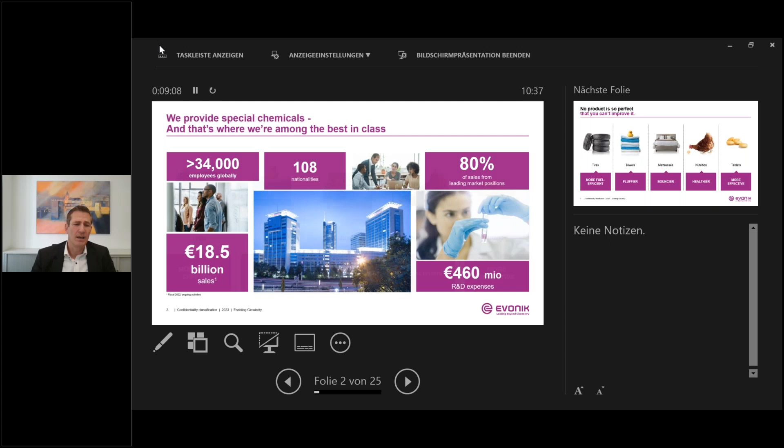And I want to inspire you a little bit with what we are doing at Evonik. Evonik, Stefan mentioned it already, is a specialty chemical company, a global company, more than 34,000 people working for Evonik. Last year we had sales of more than 18 billion euro. This means we are pretty much focused on R&D and try to help our customers along value chains to really innovate, to successfully overcome specific hurdles. A specialty chemical company means that our products are not in a B2C business. We make products better with our additives, with our products.

For instance, in the field of tires, you can't buy a tire from Evonik, but when you buy a tire, you can be sure that a product of Evonik is in it, for instance to make the tire more fuel efficient, lowering the fuel consumption. You won't be able to buy a mattress from Evonik. However, we have additives that help during the foaming process of a mattress to make bubbles of very even quality on the one hand, and on the other, the bubbles are, depending on the wish of the customer, big or small, open cell or closed. And this means you can influence the bouncy effect, and this means the flexibility of a mattress.

We don't produce tablets. In some cases, we produce the active materials, the active pharmaceutical ingredients. However, what we really do is help bring the API to the right place in the body. For instance, we have drug delivery systems that help the API go through the stomach to the gut, and then we have a specific release profile so that the API is released over a specific period of time. The benefit for you as a patient is that you don't need to take a tablet every 2 hours or something like this, but maybe just one per day, or even one within 1 week.

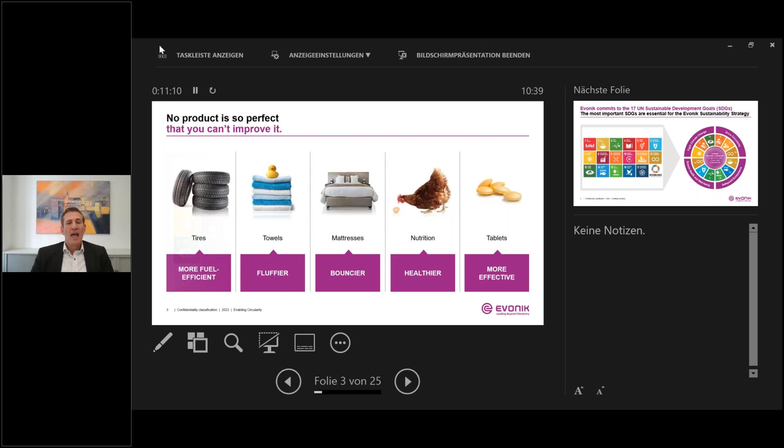I don't know what happened here.

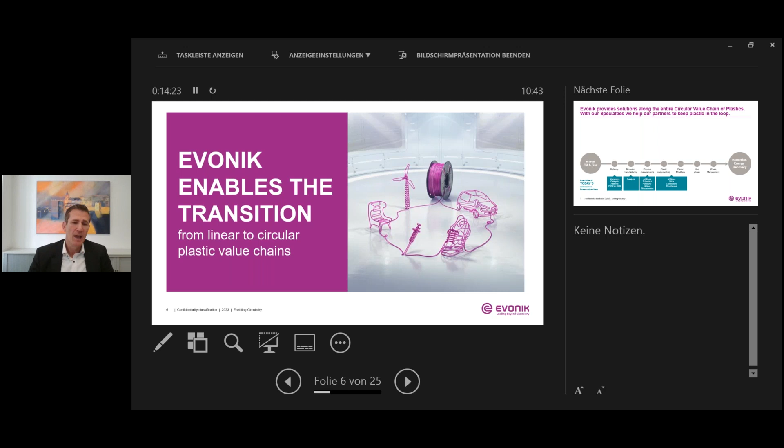One important pillar of this strategy is to enable sustainable plastic value chains. So we help our customers to meet the challenges, to overcome the hurdles of the transformation towards a circular economy. And this is what we are really doing in several different projects and actions with our clients every day. So in a linear value chain, everything starts with the mineral oil.

And along that value chain, refinery process, monomer manufacturing, polymer manufacturing, and so on, we have today many different products that are contributing: adsorbents, catalysts, our additives, but also several polymers we produce ourselves. Along that value chain, we have a significant impact on the production and products of our customers. After the use phase, the products are usually put into the waste management system and either incinerated or put into landfills.

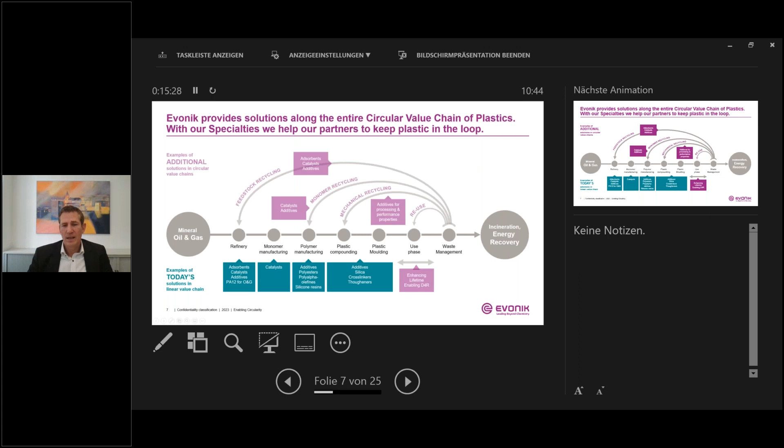And in a circular economy, we want to change it. We want to keep the material as long as possible in the loop, and this is the reuse. And when it's not possible anymore, we do mechanical and chemical recycling. And we have several specialties that help make the recycling process more efficient and the quality of the recyclates better.

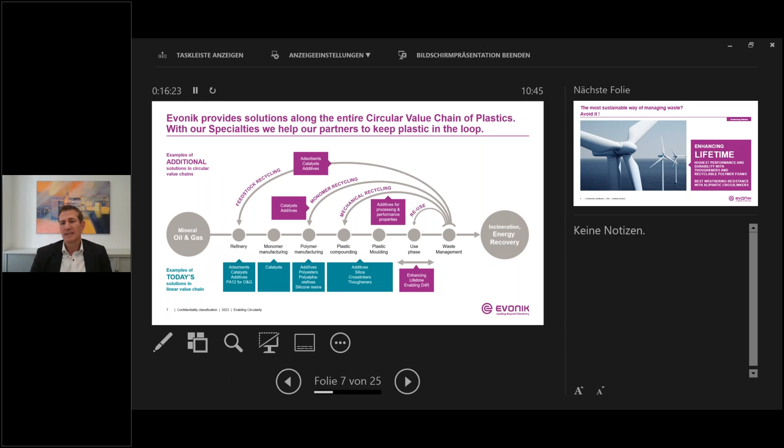In addition, we consider improving durability and enabling design for recycling concepts as part of our circularity ambition. And therefore, we are also contributing a lot to help our clients make products more durable and make design for recycling concepts possible. What does it mean? So, for instance, we have many different products that are used in wind blades.

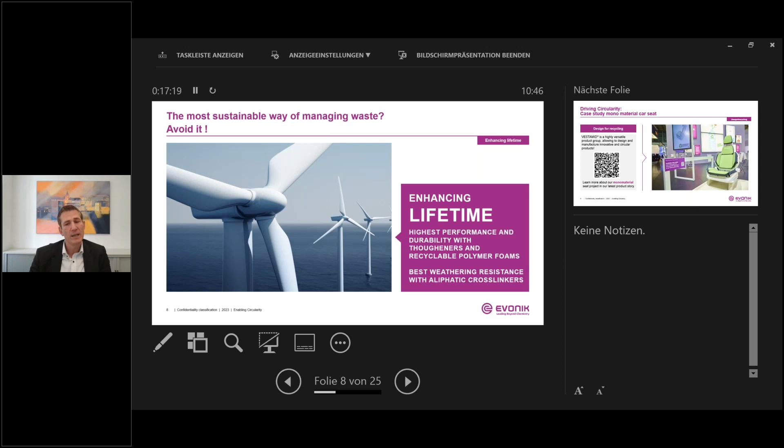For instance, in the coating, we provide aliphatic cross-linkers with the best weathering resistance, so that the rotor blade is covered, and the weathering resistance provides higher durability. We also provide foam material which is used in the core of the wind blade for stability reasons. This foam material is based on polymethacrylimide chemistry, and we are able to recycle it as well. So the foam material itself is recyclable. This is one example of what we consider design for recycling, and this is another example.

In our portfolio is polyamide 12, and polyamide 12 is one of the highest performance thermoplastic polymers, and we tried to think a little bit out of the box. So we said, okay, what would happen if we designed a car seat completely made from polyamide 12? Usually a seat contains 15 to 20 different kinds of polymers, so polypropylene, polyurethane foam, PET, textiles, and so on. And we said we want to replace all the different materials to provide a monomaterial seat.

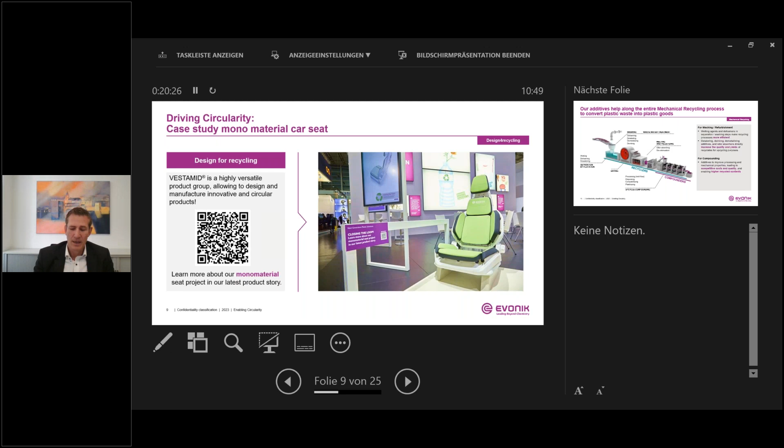Mechanical recycling is one of the most efficient recycling processes of plastics, and of course our role as a specialty chemical company is not to do the recycling process ourselves, but to help the recyclers make the process more efficient. So we have additives for washing, for separating by flotation, for the drying process to make the washing more efficient and the quality of the recyclates better.

In addition, we are able to increase the quality of the recompound significantly by our products. So for instance, very often you have different fractions of polymers that are not compatible to each other, and we are the ones who bring the compatibilizer in, so that the quality and the performance of the recompounds are significantly better. So in a nutshell, we help our clients to reduce the costs and increase the quality, and this at higher recycled content levels.

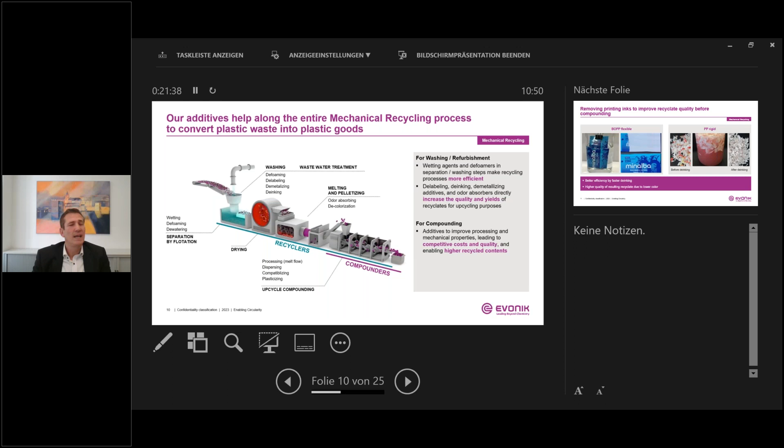Just to inspire you a little bit on what we are doing, this is one example of flexible films. You often have a printing ink on it, and we have the additives that help to remove this printing ink completely and fast. Completely means the color is reduced significantly, and this means a colorless recyclate can be used for different applications, so it's a kind of higher quality recyclate. And on the other hand, we help to do this process fast, and this means you save costs. And this is possible in case of printing inks, like on flexible films, but also on rigid or flakes as well.

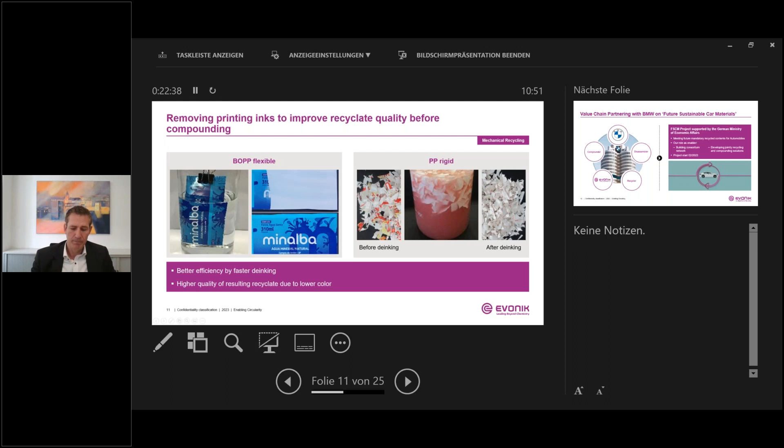I mentioned that we have to partner along value chains, and this is really the most exciting difference to a linear value chain, because we need to understand the different challenges at one specific stakeholder in order to overcome hurdles. I'm really proud that we started an ecosystem with BMW, and we take care of recycling of bumpers and other components of a car that are made from plastics. And of course, our role is providing the additives to make the recycling process more efficient and the quality of the recyclates better by discussing with the recycler. So helping to remove the coating from the bumper, for instance, but also helping the compounder to meet the requirement profile of BMW.

The project started last month, and it will take some years. However, we are really optimistic to meet all the different challenges. And the good thing is, when we see some hurdles, we can also discuss with the OEM, hey, is it a good enough quality for specific applications, or is this something we need to improve even further? And collaboration means you can really openly and trustfully discuss in this ecosystem the challenge you are having.

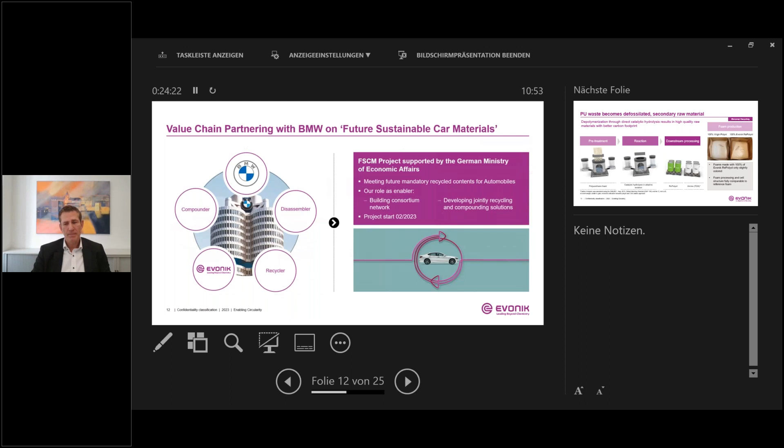So I mentioned in the early beginning of my presentation that we are working also in the field of PU mattresses. So the mattress market for us is really important, and we took the responsibility and said, okay, let's develop a recycling process for polyurethane mattresses, and this is shown here.

So we are able nowadays to use the used mattresses to convert the polyurethane foam into monomers. This means the RePolyol and the amine, which are the main components of such a polyurethane formulation. And this is a chemical recycling process, really a very challenging recycling process.

And we are really proud that the polyol, for instance, can be used by 100%, and the performance of the foam, the mechanical properties are more or less the same compared to the virgin polyol. However, you can see the color is slightly different, and this is something we need to work on.

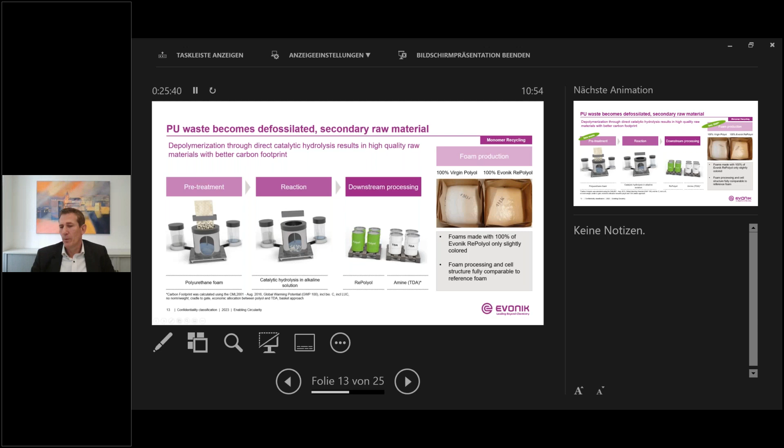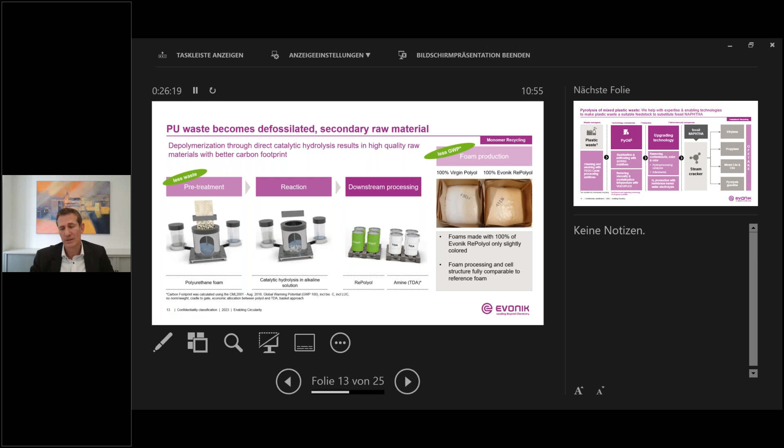However, in the end, as it is 100% RePolyol, you can, of course, claim that the greenhouse gas emissions, the carbon footprint is significantly lower, up to 60%, according to our life cycle analysis we made from our, let's say, pilot plant process. In addition, using the waste as a feedstock means the waste is significantly reduced, and this is circular economy. You use the waste as a feedstock to produce new products out of it.

And this is also the concept by using mixed plastic waste, which is not suitable for mechanical recycling. So what we have seen so far, mechanical recycling is the most cost-efficient process to recycle thermoplastic waste streams. However, when it comes to mixed plastic waste, when it comes to plastic waste which is contaminated somehow, you can't do mechanical recycling in a very economical and ecological way. And therefore, a good complement technology is the pyrolysis technology of those materials.

And the process is relatively easy on the paper. In reality, it's really challenging because of the challenging plastic waste feedstock. So the plastic waste is converted in a liquid pyrolysis oil, and this pyrolysis oil is intended to be used in a steam cracker to replace fossil naphtha. The steam cracker produces olefins, so ethylene, propylene, butadienes, something like this.

What we have seen so far is, I mentioned in the beginning, that the process is on the paper relatively simple, in reality a challenging process because of, for instance, the contaminants. You have several different contaminants, chlorides, for instance, in the PyOil that need to be removed before the PyOil is managed in the steam cracker, because chlorides, for instance, are causing corrosion issues.

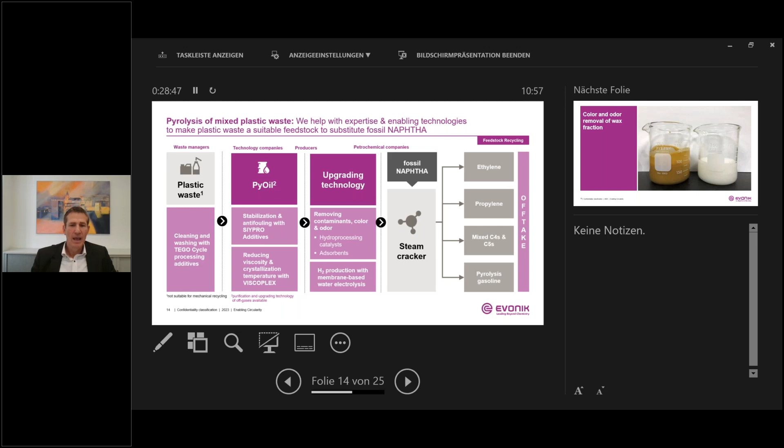This is a typical PyOil after it is liquefied, and we are the ones who are really removing the color. We are the ones who are really removing contaminants and therefore odor, and the result is a very pure py wax in this picture.

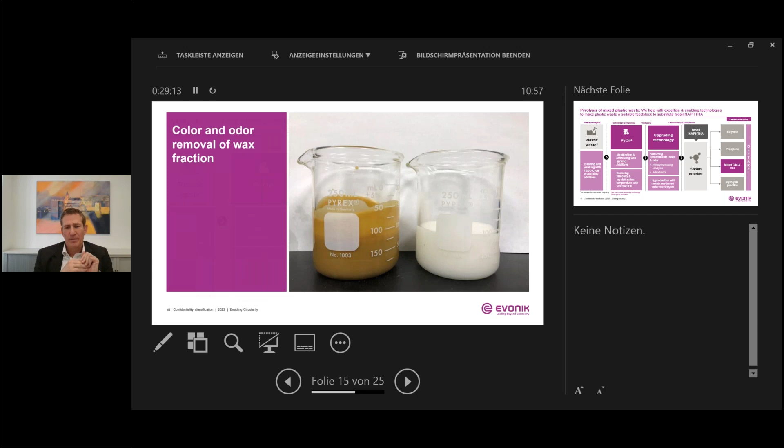But I said the pyrolysis oils are managed in a steam cracker to produce ethylene, propylene, and butadiene. And Evonik is, of course, also an off-taker of those materials that are used, for instance, to produce polyamide 12. And this is one example what we are doing.

We use the butadiene coming out of this steam cracker process, and we use the pyoils in a mass balance approach to really provide polyamide 12 elastomers, for instance, with a recycled content of 50% based on the pyrolysis oils our suppliers are using. And this reduces the product carbon footprint significantly. Important is to mention that we are also using renewable energy to produce those polyamide elastomers.

And these materials are used then, for instance, in such shoes. So in general, the quality is absolutely identical to the quality of the fossil polyamide 12 elastomers. However, the product carbon footprint is lowered and the recycled content is significantly increased.

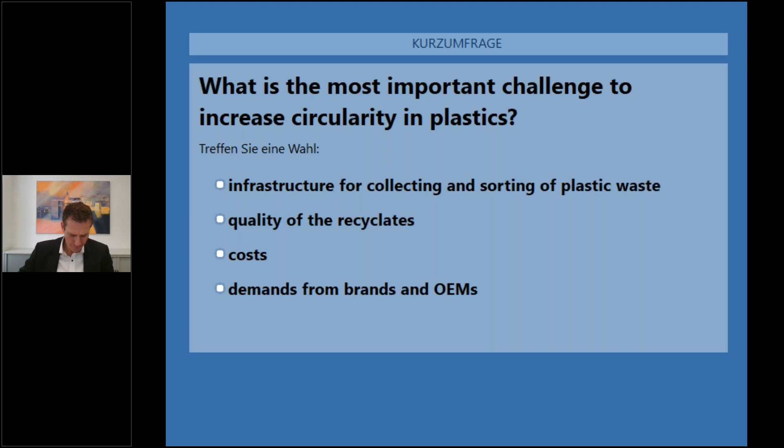You have the result of the third poll. We have 76% of the participants who have gone ahead with the first option, which is infrastructure for collecting and sorting of plastic waste. The rest, 11% have gone ahead with quality of the recyclates, 10% cost, and 3% demands from brands and OEMs.

This is also very exciting because it shows that we need to give the plastic waste a value, and then collecting and sorting will somehow be managed by the located infrastructure companies in order to sell products. So business relevant value is important here. Correct.

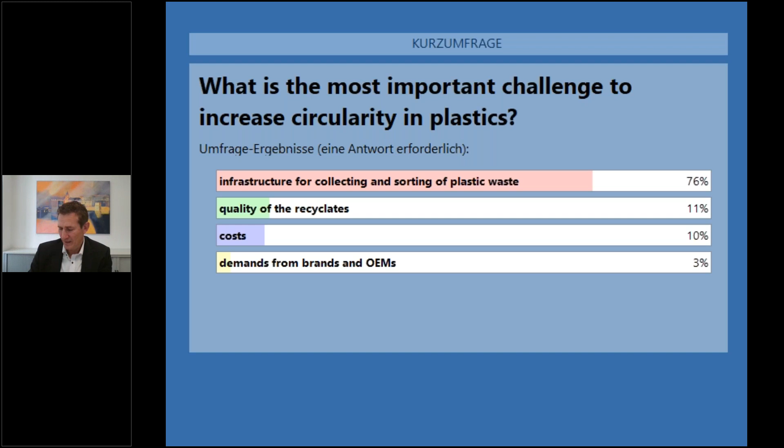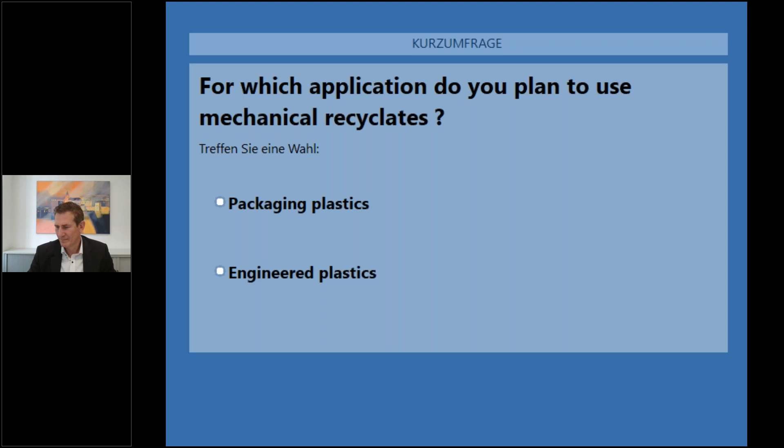Here we have the second last poll. For which application do you plan to use mechanical recyclates? Okay, so 59% have gone ahead with packaging plastics and 41% with engineered plastics.

This is somehow surprising because I thought that packaging plastic is easier to recycle because it's simply a bigger volume. However, it's exciting because it means that especially improving specific performance criteria are the most important in engineering plastics.

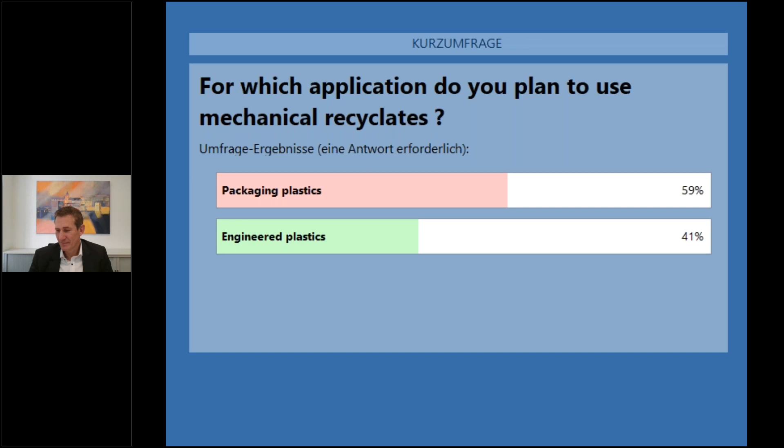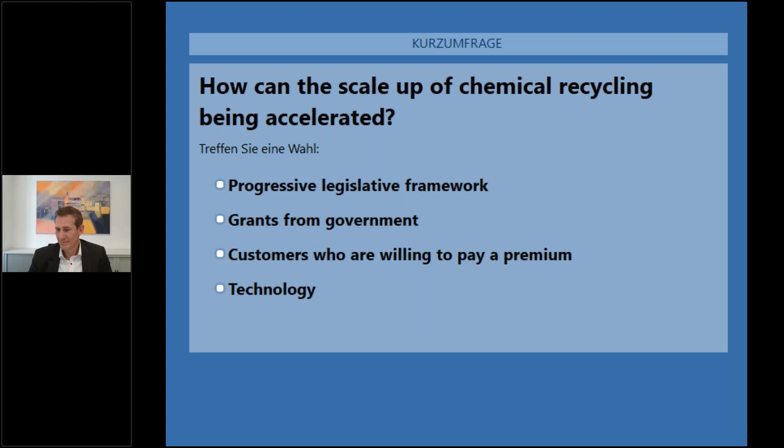Here's the last poll of the session. How can the scale up of chemical recycling be accelerated? We have the maximum vote of 49% for technology, then 34% for progressive legislative framework, 11% grants from government, and 7% customers who are willing to pay a premium.

Quite interesting. And this means it's good that we are talking about it and that we give this presentation, because we are now approachable, we are now visible to you guys. And it would be really our pleasure to talk to you about our technological solutions and how we can jointly improve our recycling processes.

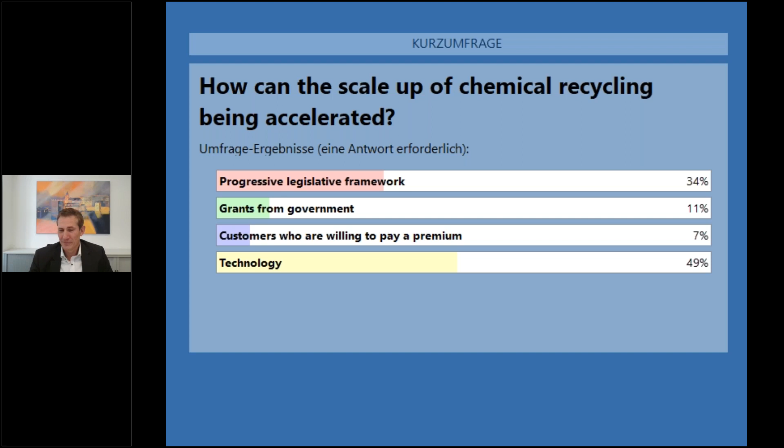Thank you so much. The answers make me really optimistic that we really can do the transformation towards a circular economy of plastic. Now we will quickly go ahead with a short Q&A round.

Okay, so the first question we have here is, what is the best solution for mixed plastics? Why? And what is the economical viability of such projects? So I showed in the presentation the pyrolysis technology. Pyrolysis technology is good for mixed plastic waste streams that have a high content of polyolefins, so hydrocarbons. And this is, from my point of view, the most important technology that will be scaled up globally within the next 5 to 10 years.

So we see all over the world that companies, especially petchems, are working on projects to make the pyrolysis process commercially available. And they have investment projects started to have a first commercial plant available by 25 to 26. And this will be for sure only one step, and the second step towards 2030, when, especially in Europe, regulatory challenges will become effective, will result in further plants all over the world.